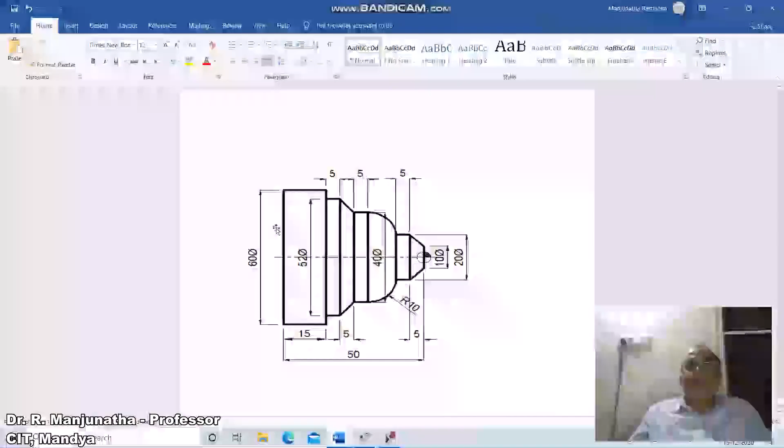Generate a program using Mastercam for the component to be machined as shown in this figure. So we need to model this figure. So to do that, first we will go for

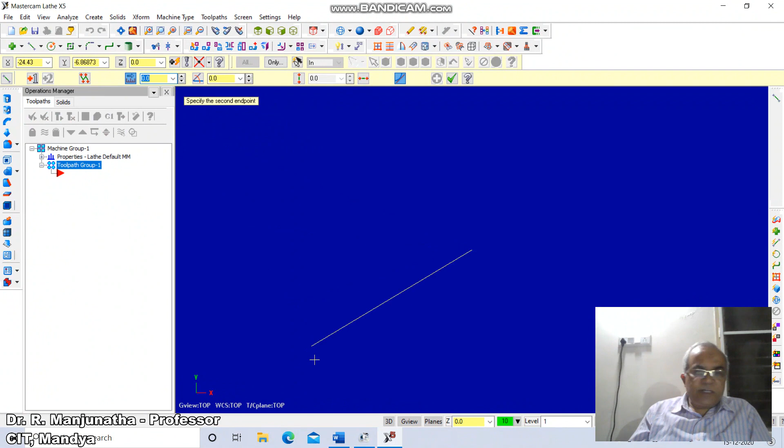machine type lathe default, then go to line command, draw a line from 0 0 0. Since the diameter is 10, we want it for 5, so go to 5 mm length by angle 90, so we have a straight portion.

Then we have 50 mm offset, so go to Xform, take the distance of offset 50, so from here you offset it, then go to fit, then go to line command, draw a line from endpoint to this.

Then we have 60 mm diameter, so Xform, offset, take the distance as 30, so from here you offset and go to fit and extend this line till here.

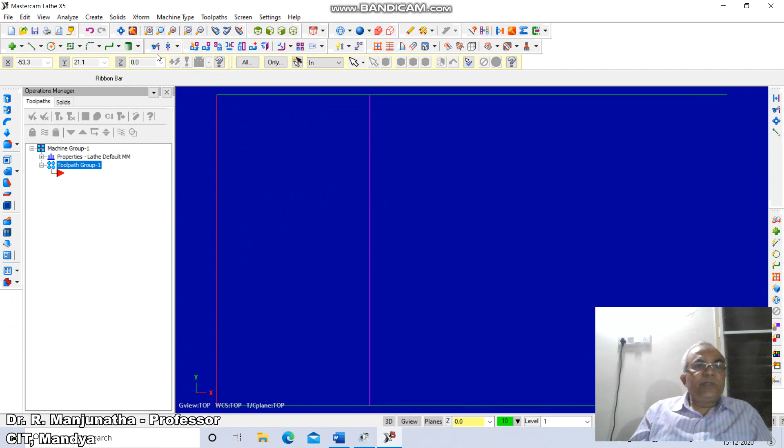Once you do that, we have 15 mm, so go to Xform, offset, take the distance as 15, so from here you start doing this. Then trim this line till here.

Then we have 52, so Xform, offset, take the distance as 26 because it is 52. Then again offset, take the distance as 5, from here it is 5. Then trim this line till here, and trim this line till here, and trim this line till here.

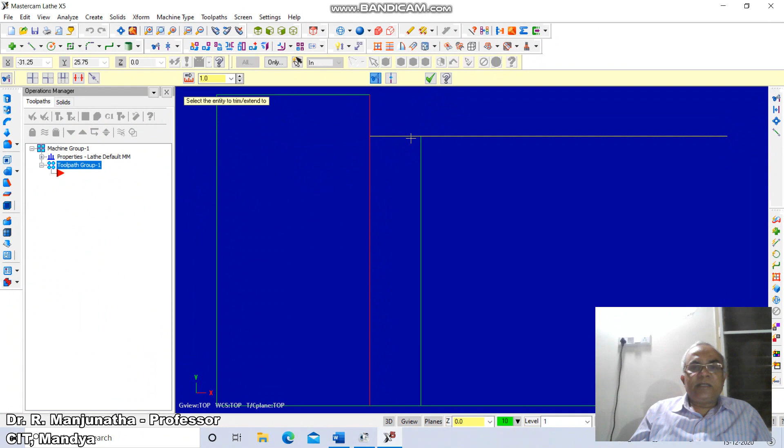Once you do that, again you have 5 mm offset. So go to Xform, go to offset, take the distance as 5 mm, so from here you take 5.

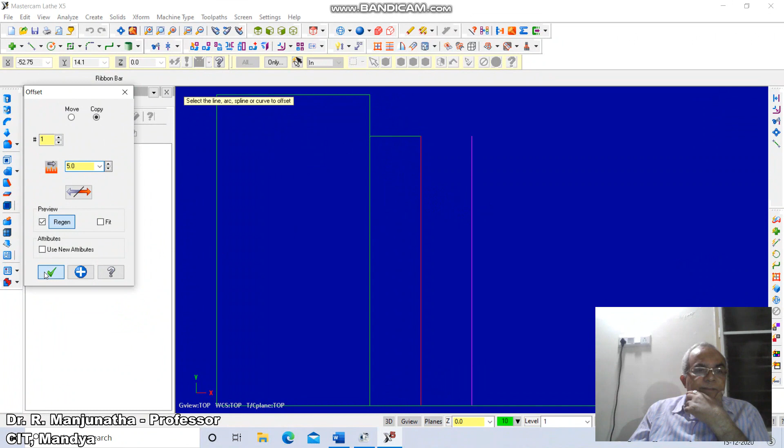Then you have a taper there, which is of 40 mm diameter, so go to Xform, offset, take 20, so from here you take 20, then draw a line from there to there. So go to line, take end point of this to end point of this, then go to Xform, then trim this line till here, so trim this line till here.

Then we have a straight portion of 5 mm, from here to here it must be 5, so go to Xform, go to offset, take the distance as 5, so you will have a straight portion to this, and then go to extend this line till here.

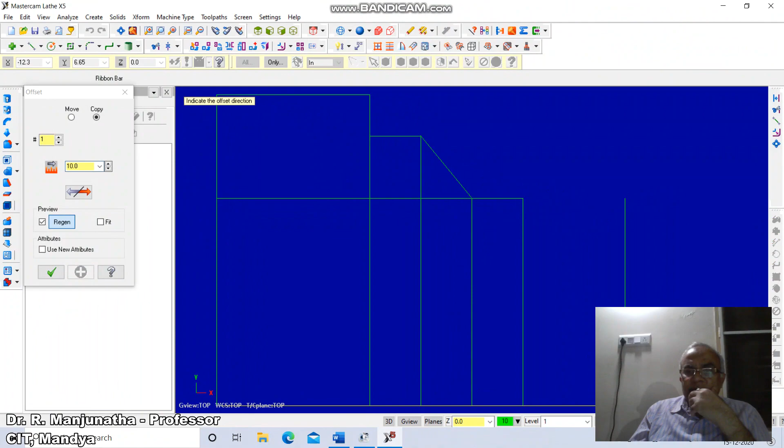So now we have a straight portion, and from here again you have an offset of 10 mm, so go to Xform, offset, take the distance as 10 mm. And the diameter is 20, so again you take offset, the distance is 10, so from here you take the distance

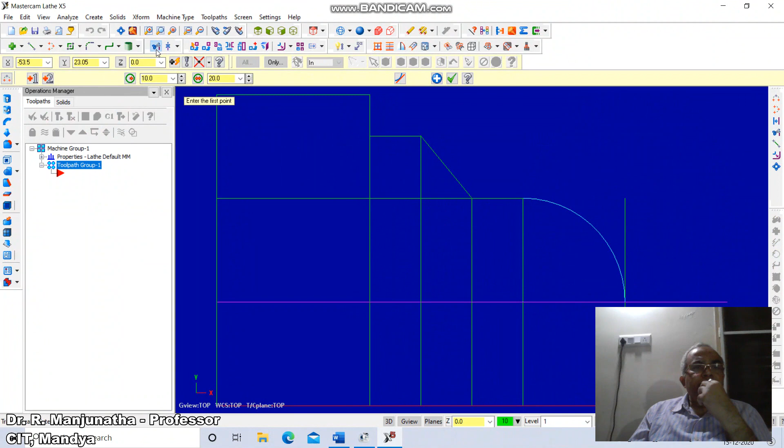and go to arc by endpoints, so you take end of this to end of this and take the radius as 10. We want to retain this portion, so then trim this line till here, then trim this line till here, so we have this portion created.

Once you do that, after this radius there is a straight portion of 5 mm, so go to Xform, offset, take the distance as 5, so from here you have a straight flat portion, and trim this line till here, and trim this line till here, and trim these lines till here.

Then you have a straight portion, then you have a line, you take end point of this to end point of this. So this is how you will be able to create the model. Once you do that, we need to erase all other entities.

You just erase this. Again you go to erase command, erase this line. Again erase this line, and similarly you erase this line here, then you erase this line here.

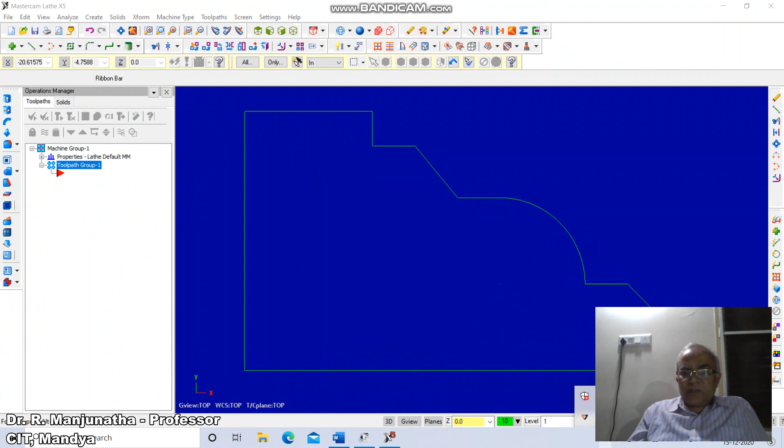So this is how you will be able to generate the model. Once you do that, now we need to go for the profile machining. So to do that, first we go to properties, go to file, click on tool settings, enable from material, and then go to stock setup, click on properties.

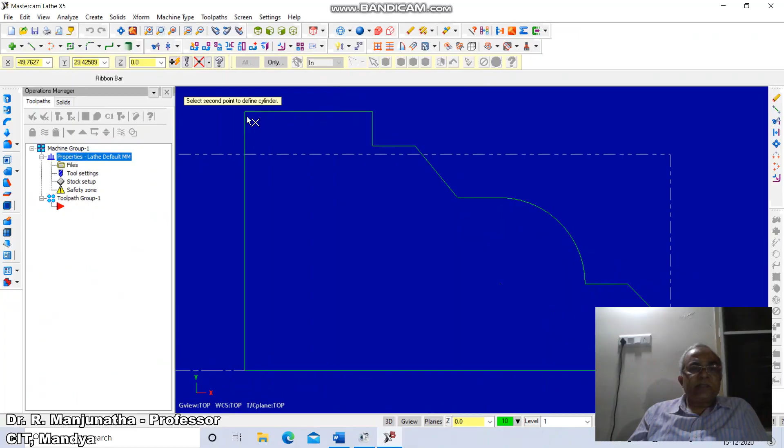So you click on make from 2 points. You just click these 2 points, then go to use margins, and then go to OD margin as 2, and then right margin as 15, and then the left margin as 5. So once you do that, you just go to right tick.

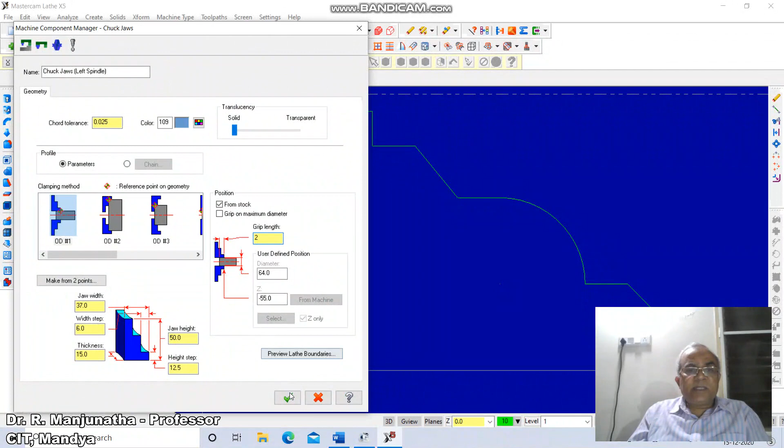Again you come down to chuck jaws operation, then click on OD1, then go to from stock and take the grip length as 2 and say right tick, and also you just right tick this. So now when you go for the machining, here you have to go to the tool paths. So click on tool path, click on face, click on OK.

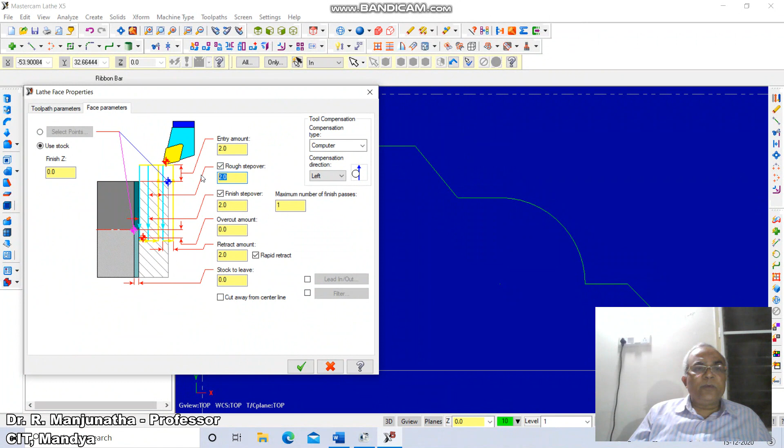Then you take T0101 OD rough 80 degrees, then enable mm per minute, then go to face parameters, click on rough step over and make it 0.5, and number of finish. So here click on face parameters, click on right tick to clear the dialog box. So now the facing operation has been done.

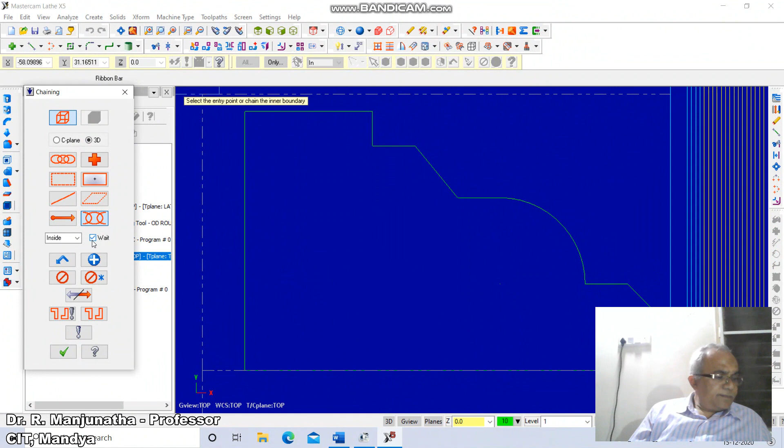So once you do that, now we go for toolpath, click on toolpaths, click on rough, click on partial, click on wait or enable wait. So you just click on this. So now it has to go in the opposite direction and come down to this. So this is how you will be able to select the profile on the contour of the machining what you want to do. Then click on rough parameters.

So here you just click on the rough parameters. So here the depth of cut, which is 0.5, make it 0.5, then click on OK. So now the roughing has been taking place along with this profile. So we're going to get this.

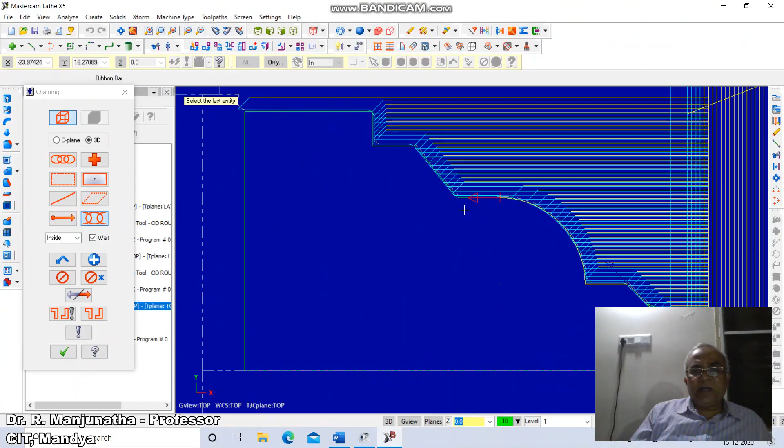Once you get this, again go to toolpath, click on finish, click on partial wait. So again you just click on this. So this is the profile, the direction in which it is moving. Then click on right tick. Now we want T1212R 0.8, 55 degree.

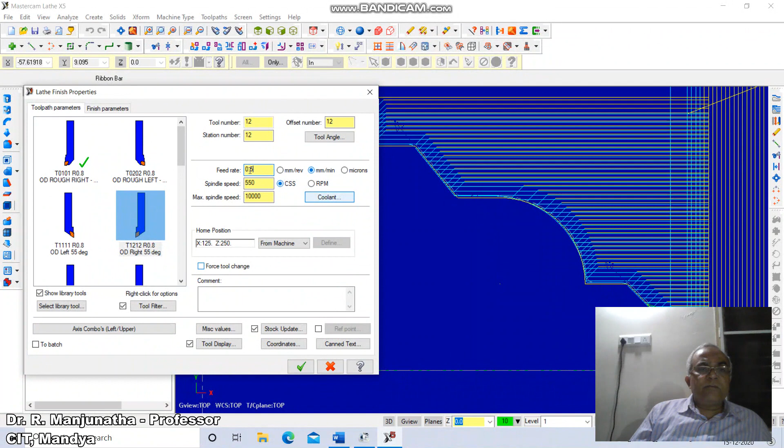Click on feed mm per minute. Click on the feed rate as 0.25. Then click on finish parameters. Click on step over as 0.5 and number of finish passes as 2, and click on right tick. So this is the finishing operation what it does.

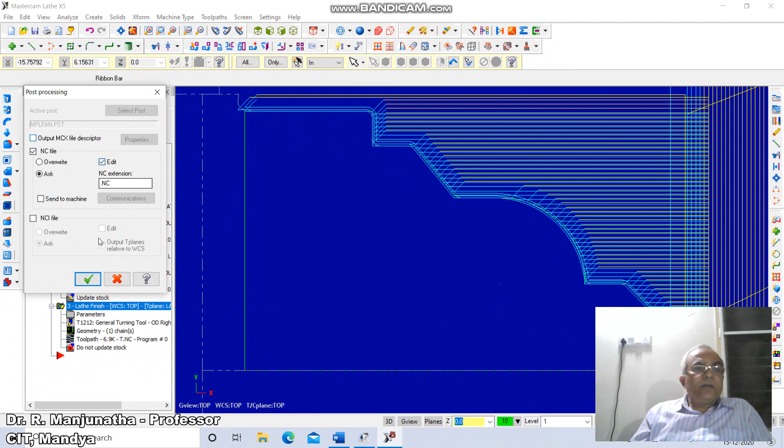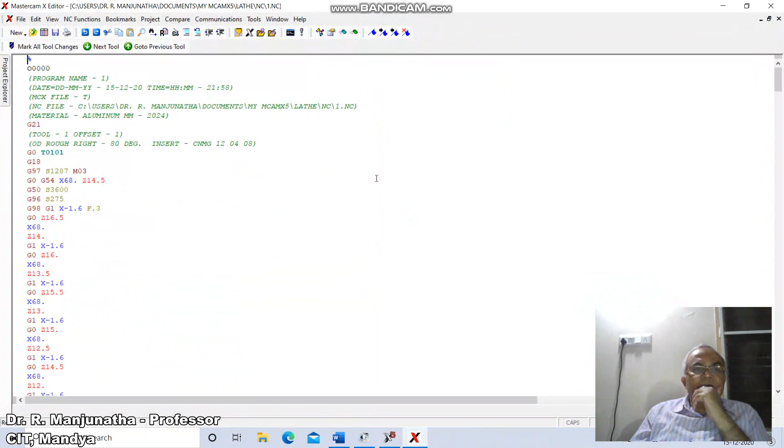So now I will say 1 and say right tick. This is the automatic generation of codes what you are going to get from here to here. So this is the generation of codes, which will be there for about 482 lines. That is the one which is going to be fed into your CNC.

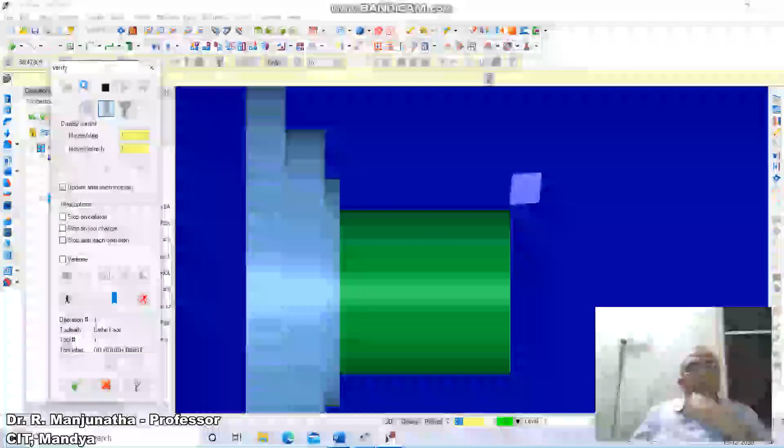So come down to toolpaths, click on verify selected operations. Now you just click on play. So now the facing operation has been taking place. Once you do that, now the roughing will start, the rough profile machining. So this is the rough profile machining that has been taking place.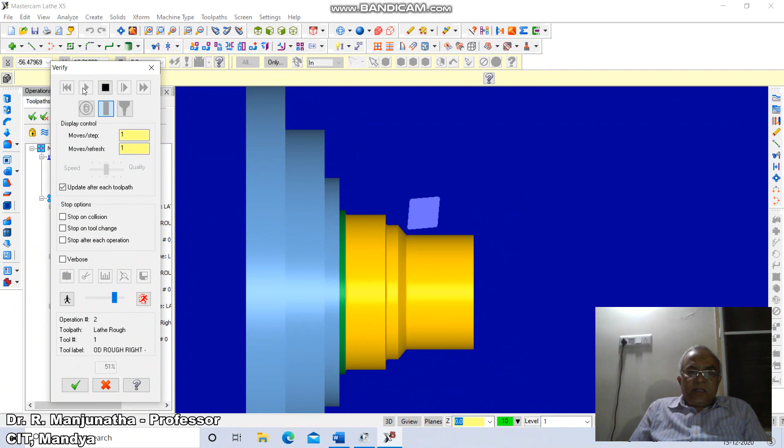So this is the canned cycle what we are trying to get, which has been fed to the computer or the CNC machine to generate the M and G codes, which is automatic generation, selected by the canned cycles. So this is the profile it has been generating. This is for rough profile roughing. Now the finishing operation has been taking place. We have number of passes 2. So this is how you will be able to get the model.